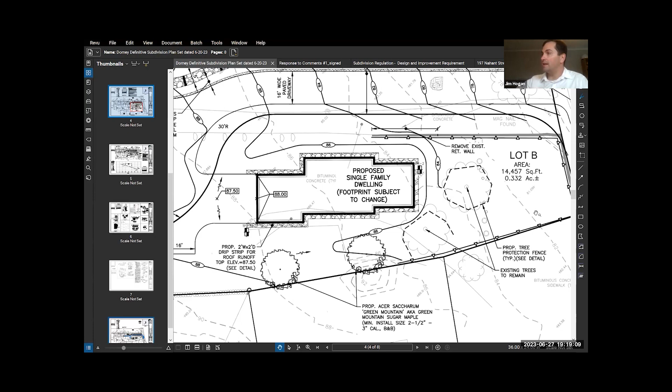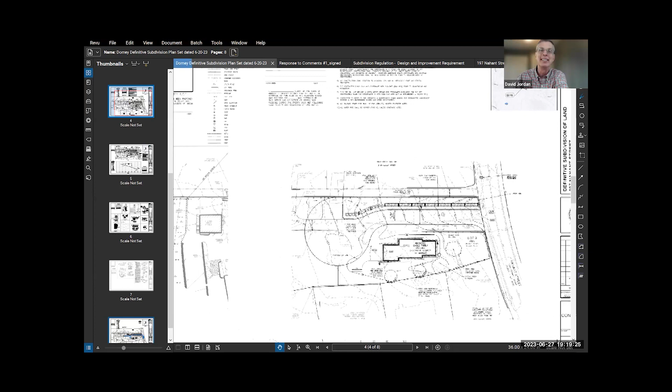Oh, well, I apologize if I misread the key. Hopefully our key is correct. I'll take a look at that. Okay, yeah, but if that's an erosion control barrier, then I withdraw my comment.

And I know there's a large number of comments that came at you all at once. If you need any clarification or me to restate any of them, I'm more than happy to do so. I mean, is that in an email that could be forwarded to us or excerpted from and sent to us? Yeah, for sure, that'd be great.

Since Matt has asked the question about the stone drip trench encroaching into a tree's root potential, and maintenance of the stone drip edge around the house, is that something you can speak to just informally now?

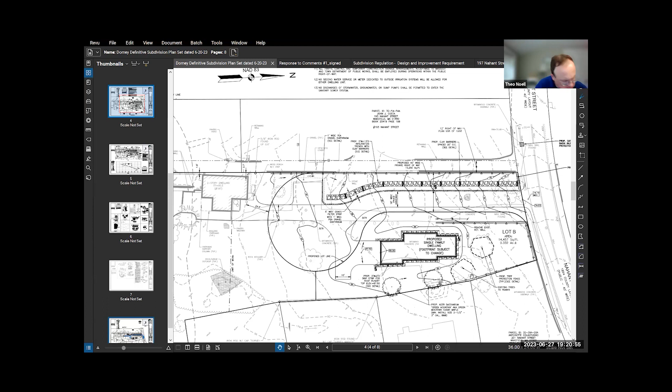Yeah, in terms of maintenance of the drip edge, it's really just monitoring it to make sure that over time water is still infiltrating into it. It needs to be kept clear of any leaves or debris. The only thing coming into it is what's coming off the roof, so there shouldn't be a lot of contaminants getting in there. But honestly, the maintenance is if it gets to a point where it's not infiltrating, the stone just needs to be dug out and replaced with clean stone, down to where it's interfacing with the underlying soils, to restore the infiltrative capacity.

In terms of the encroachment to the one existing tree in particular that we're closest to, we did check the extent of the canopy, and I think it's fairly accurately reflected here that we're just barely into it. I think we're in a little bit of a fill situation on this end of the house, so any disturbance in that area to the root structure would be absolutely minimal, because we're pretty much at the limits of the drip line, the crown of the tree.

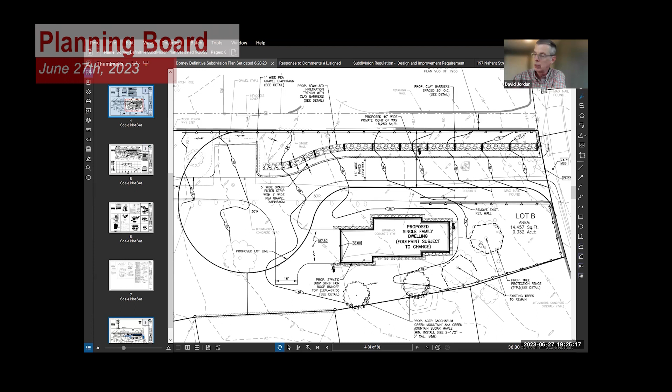It is, you're correct. So starting with the easy one, the drip strip for the new house - whoever owns that house has the responsibility of maintaining it. As far as the infiltration trench along the shared driveway, I guess I need to defer to Andrew and maybe his attorney as to how they're envisioning structuring this with a potential future homeowner using that driveway to access their house, whether there would be a shared cost aspect to it, or if it would remain solely with the existing house in the back.

And I think that is something that needs to be vetted a little bit further.

Perhaps I can address that, Mr. Chair, if I may. So we haven't gotten that far, not having approval of the subdivision yet. We haven't got to the point where we're designing the property rights arrangement. But for a project like this, what I would imagine is a 2-unit homeowners association that would have provisions for sharing responsibility and financial cost of maintenance of the drainage structures, maintenance of the way, snow removal, all sorts of things that would come with a typical subdivision. It would just be a smaller agreement between 2 property owners. Unless and until that agreement is reached, the party who's responsible would be Mr. Domey himself, because he'll be the one who owns the land under this right of way. So that's how we'll plan to approach it once we get to the point where we're looking to actually break up and deed out the property to the new owner.

And what I would suggest in terms of enforcement would be that the conditions of the board, if you vote to approve this project, be referenced in any deed and any homeowners association agreement, and provide for the creation of a homeowners association, with the agreement to be provided to the board to have in your file, so that everyone understands how the arrangement is proposed to be made.

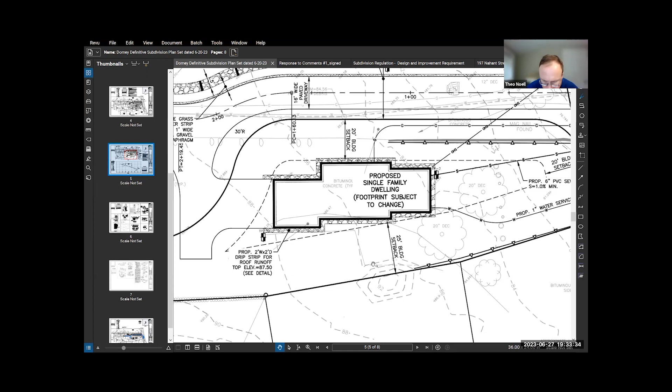There's significant improvement of recharge volume and the TSS, and everything. So I think that seems positive.

Do we have any other questions about drainage? If not, do we need to step through the resubmitted plans, just to walk through them real quick?

If you would like, Mr. Chairman, I could certainly do that pretty quickly.

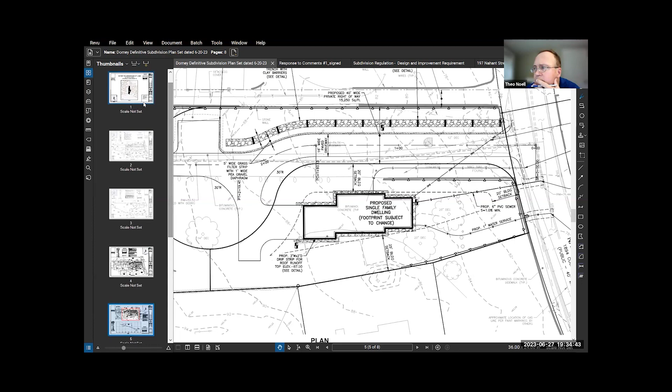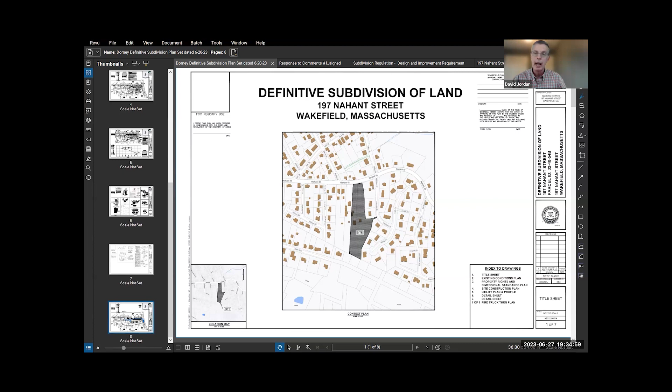I think it may just be the fire turnaround, which is the last page. That really is the only other thing that was added to this plan set. And we did have a couple of discussions with the fire department regarding this, and this is what ultimately came from it.

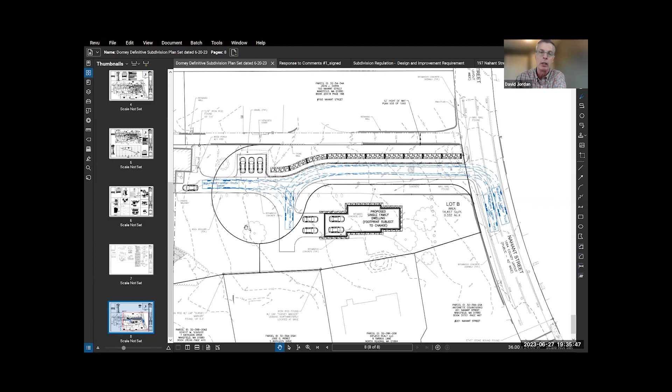What we added to this plan, because the fire department wasn't really understanding the intent of the parking for these two houses, was to show how each house could easily accommodate 4 vehicles. For Mr. Domey's house, we formalized a parking area for 3 cars, and he could get 1 or even 2 more cars right up by the house, since that's existing pavement we're tying back into. Likewise, the new house has at least a 2-car garage, with 2 cars in front of the garage door, so again 4 cars over there.

So the fire department just wanted to make sure that cars wouldn't be prohibiting them from making these turns, and I think this did satisfy him in that regard.

The parking space for the 3 cars on Mr. Domey's lot, was that widened, or was that always designed to accommodate 3 cars? That was always that size, Mr. Chairman. And we did have a fear that that would be part of the turnaround, so this is helpful. And we've made this part of the plan set now, so it'll be part of the record.

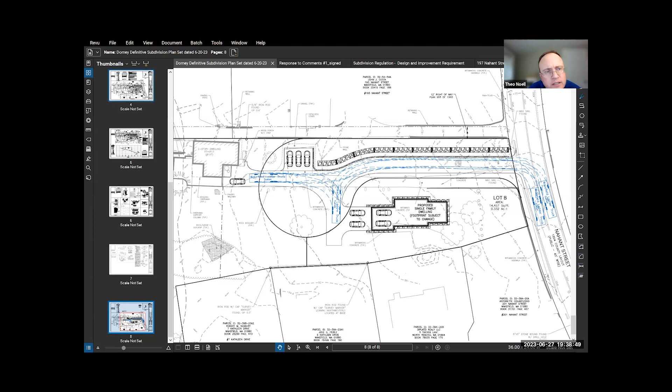Do we need to discuss trees and tree protection? And maybe it was just the one potential intrusion on that other tree that Matt raised.

In this plan here, we've shown tree protection fencing around this tree and around this tree. And there's a detail on the detail sheets showing more information on the tree protection fence.

And we previously discussed a condition that no big fence would be constructed along Nahant Street, so we'll make sure that's there. And we've got the 2 new trees for tree plantings. Will there be any other additional trees? I'm not sure, I don't think so, but we haven't proposed any additional at this time, other than the 2 shown.

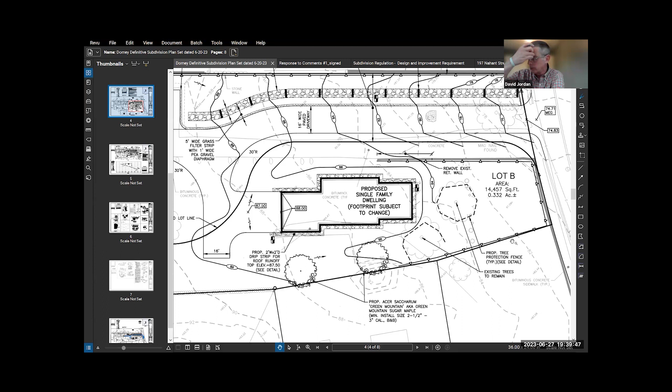And we did have discussion last time about potentially adding a condition that future construction will conform with all the town requirements, and also reflecting the maximum footprint and the drainage of this plan, so that none of that will be lost.

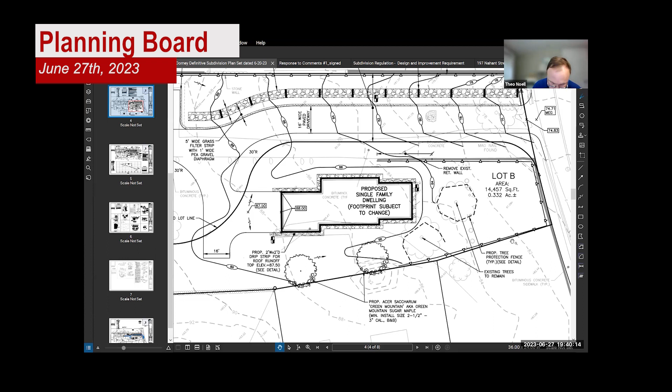When a new house is proposed to be built, will there be an updated drainage plan in reference to that house? This is more of an academic question, just to know that there will be an actual drainage plan for the actual house that gets built. Is that an open question to everyone, including the board members? Yeah, that would be my understanding.

Before construction on any house in this lot can commence, a building permit application needs to be filed. As part of that application, I believe a plot plan is required, but I would need to confirm that. The intent is that the final footprint will update the plot plan to reflect the footprint plus the actual drip strip associated with that house and the lot grading associated with it.

Okay, thank you. So I appreciate all the information, and if there aren't any other questions, we'll open it up to public comment.

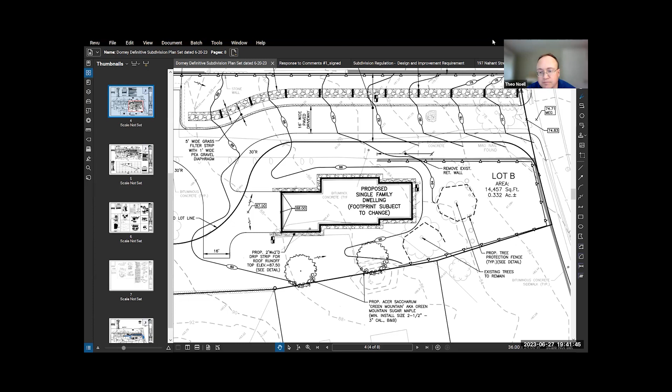Invite Bhushan or Denny. Name and street number, yeah sure. Bhushan Kulkarni, 3 Kathleen Drive.

Few questions. Again, this is a good revised plan. Will we be able to see this plan on the Wakefield website? Will the revised plan get uploaded there for review? Yes, it will be.

Excellent, and that will be both, right? The revised drainage plan and the overall plan which was shown here. Or it may be a single file, but it will cover both, right? Sorry, you said what plan? Both the site plan and the revised drainage plan — the whole file will have all the details. That's the same one which will get shared, right? It should be all in there. Excellent, I got one other question.

The setback line, which was shown and discussed in today's call, showed how far construction can go beyond it or cannot go beyond it. My question is, if there is a deck to be built for this new construction, can the deck go beyond the setback line?

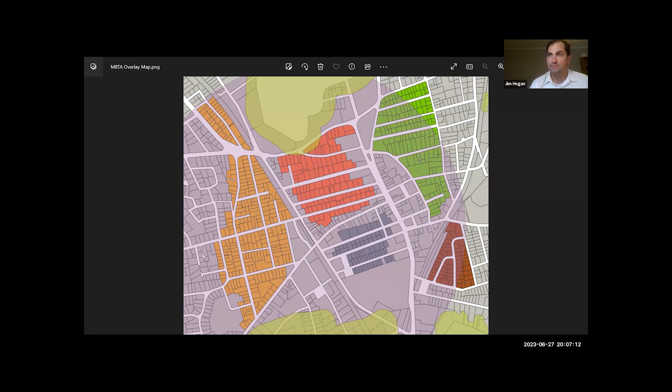Fantastic. All right. Thank you for moving this along.